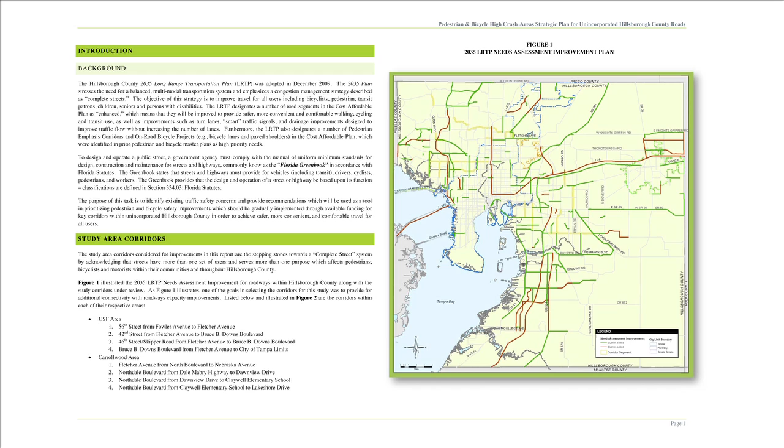The Hillsborough County Traffic Engineering section, under the Miscellaneous Engineering Services General Civil Contract, commissioned a study of these roadways to evaluate pedestrian and bicycle safety recommendations presented in the MPO report titled Pedestrian and Bicycle High Crash Area Strategic Plan for Unincorporated Hillsborough County Roads Report, and to present specific recommendations for implementation of improvements appropriate to these corridors.

The corridors include 56th Street from Fletcher Avenue to Fowler Avenue, 42nd Street from Fletcher Avenue to Bruce B. Downs Boulevard, Bruce B. Downs Boulevard from Fletcher Avenue to Bearss Avenue, Bierce Avenue from North Dale Mabry Highway to 22nd Street, Fletcher Avenue from North Boulevard to Florida Avenue, Hanley Road from Hillsborough Avenue to Waters Avenue, and finally Waters Avenue from Sheldon Road to Florida Avenue.

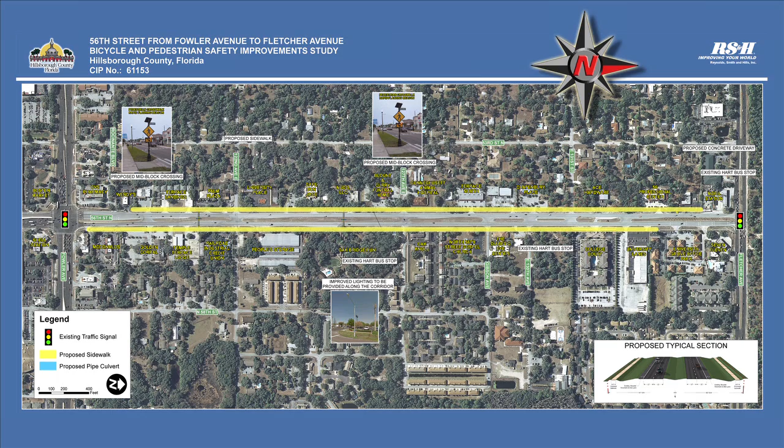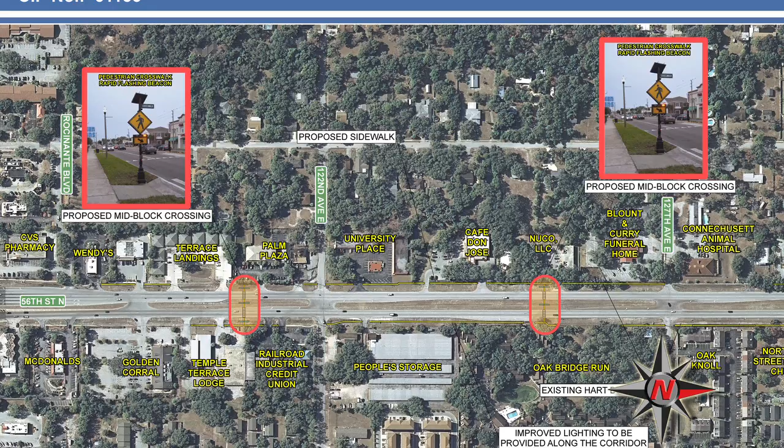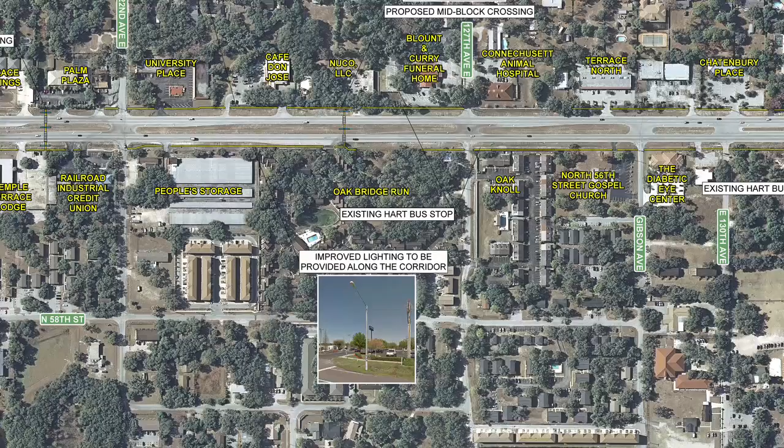For 56th Street from Fletcher Avenue to Fowler Avenue: install approximately 3,200 linear feet of sidewalk along the west side and approximately 2,500 feet along the east side where gaps occur today. Install 2 high-visibility mid-block crosswalks with rapid flashing beacons at 122nd Avenue and 127th Avenue. Existing Hart bus stops will be relocated to the new mid-block crossings. Install street lighting along both sides for the project limits to provide for safer pedestrian and bicycle travel at night.

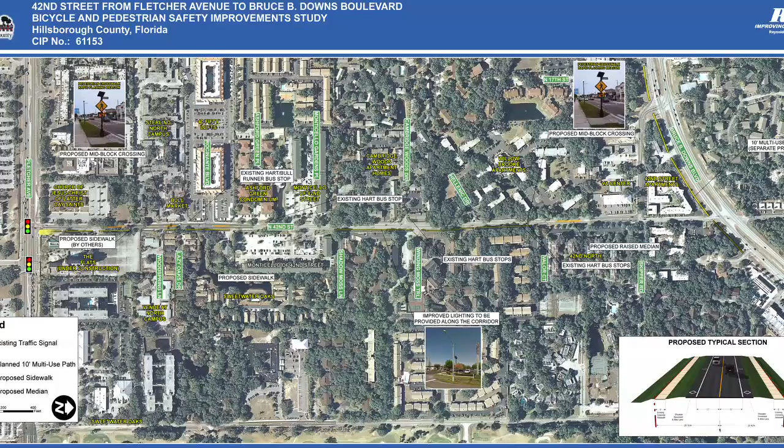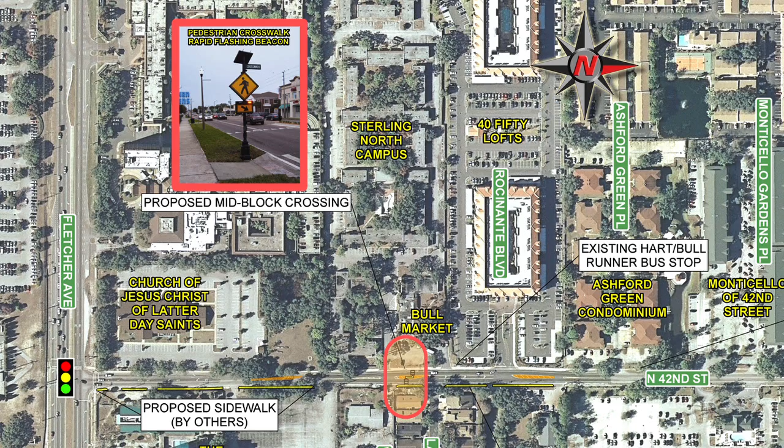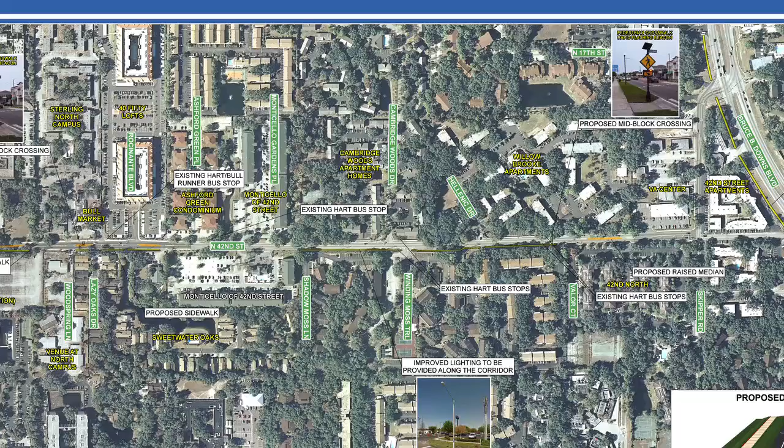For 42nd Street, from Fletcher Avenue to Bruce B. Downs Boulevard: install approximately 1,500 linear feet of sidewalk along the east side where gaps occur today. Install 2 high-visibility mid-block crosswalks with rapid flashing beacons between Woodspring Lane and Lazy Oaks Drive and just south of Valor Court. Hart will relocate existing bus stops to be realigned with each new mid-block crossing. Install street lighting along both sides for the project limits.

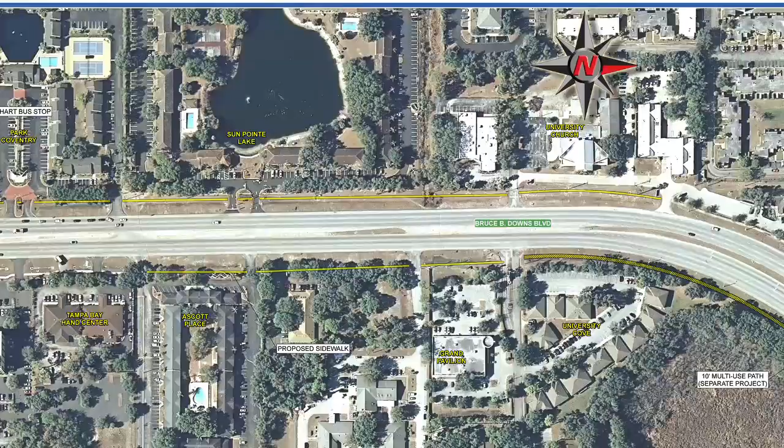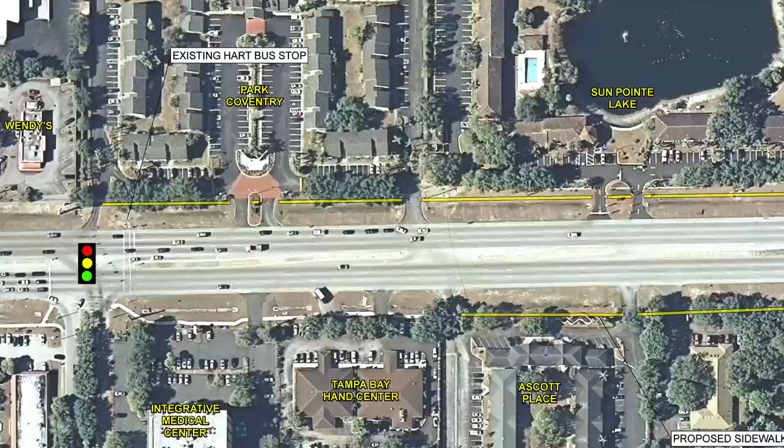For Bruce B. Downs Boulevard from Fletcher Avenue to Bearss Avenue: install sidewalks on the east and west side to fill the existing gaps in this segment of the project. Also proposed are some lighting improvements to provide for safer pedestrian and bicycle travel at night. The lighting upgrades will be done by TECO Energy and are currently under design.

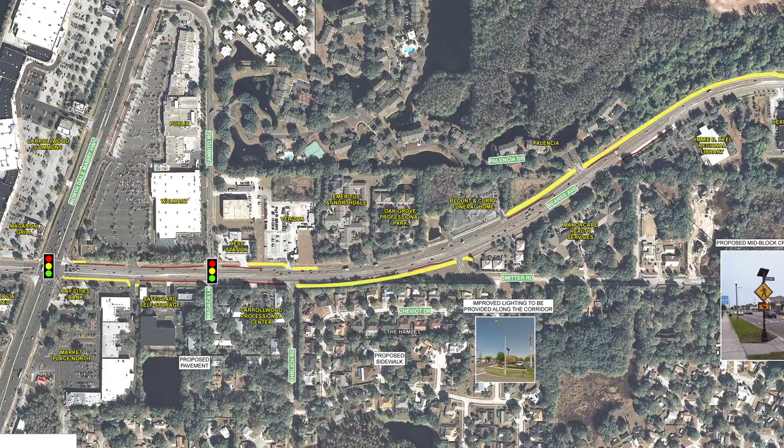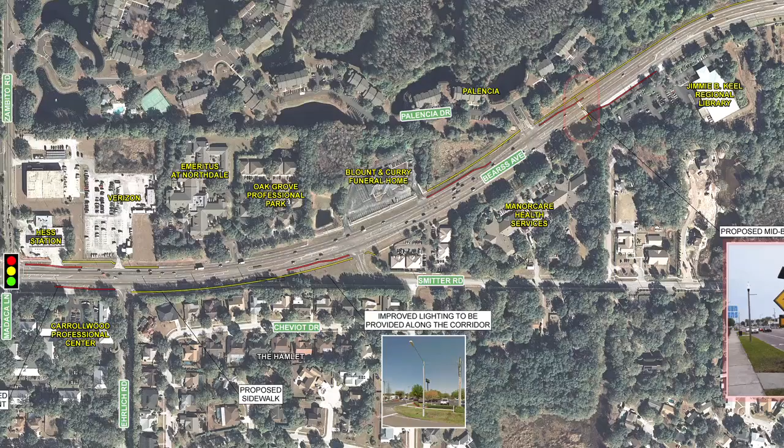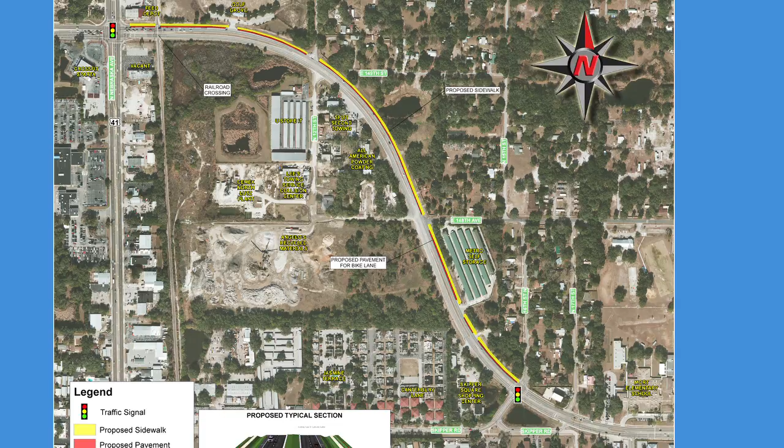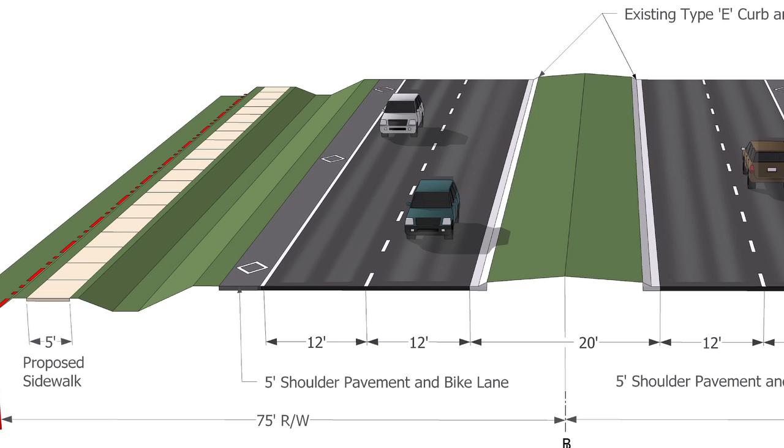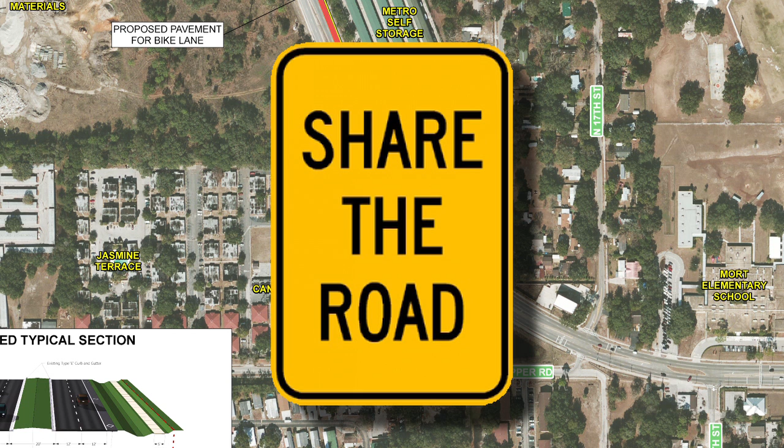For Bearss Avenue from Florida Avenue to 22nd Street: install sidewalks on the north side from Nebraska Avenue to Skipper Road to fill the existing gaps. Widen the existing paved shoulder on the north side between Nebraska Avenue and Skipper Road to provide for a bike lane in the westbound direction. Restripe the existing bike lane pavement markings along Bearss Avenue from Florida Avenue to I-275 and install Share the Road signage between Florida Avenue and 22nd Street. These improvements will improve safety by enhancing driver awareness of bicyclists using the lane.

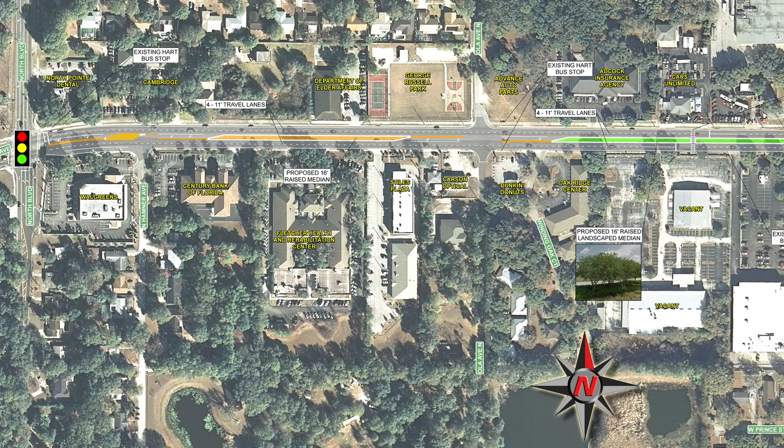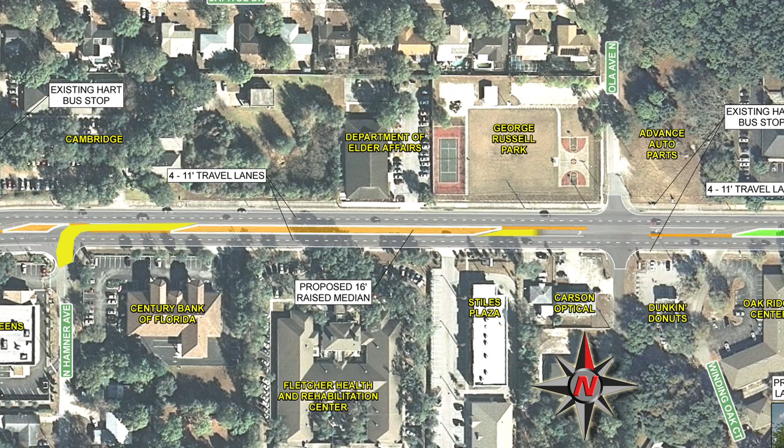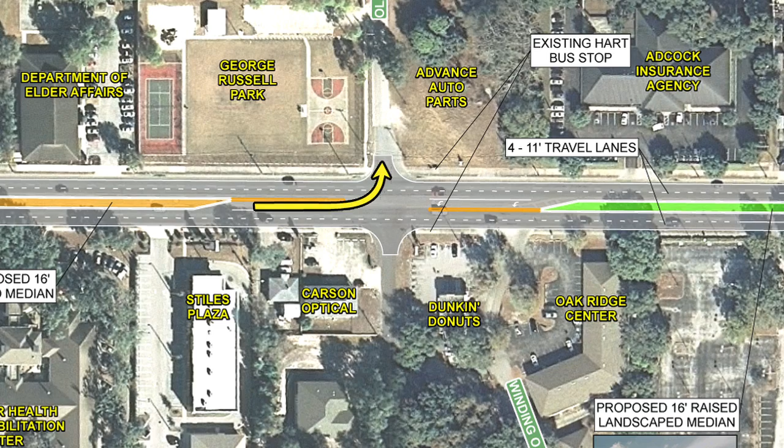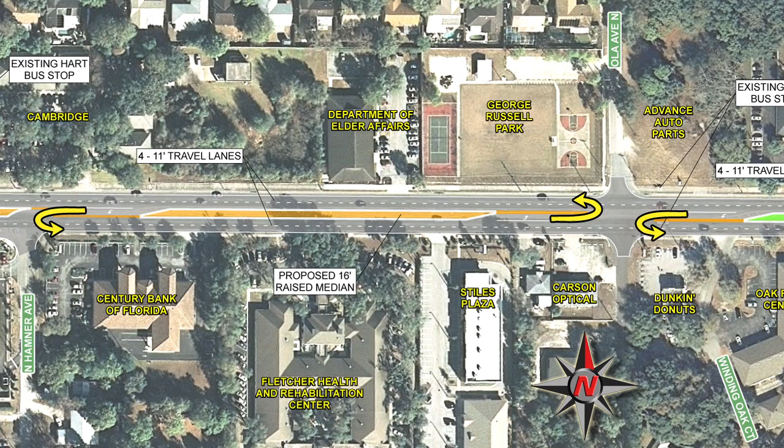For Fletcher Avenue, from North Boulevard to Florida Avenue: construct a raised median to create a safer environment for pedestrians and motorists by providing a refuge for pedestrians, while also reducing the number of lanes a pedestrian must cross at one time. Median openings are proposed at 2 locations: a directional median opening for left turns onto Hamner Avenue and a full median opening at Ola Avenue. Left turn access to properties along Fletcher Avenue affected by the raised medians will be obtainable by making U-turns at any of the proposed median openings. In addition, a mid-block crossing with improved street lighting is proposed approximately 600 feet west of the Florida Avenue intersection.

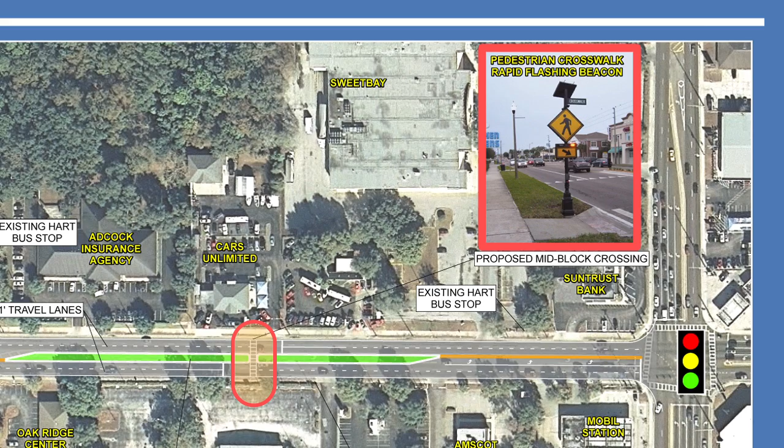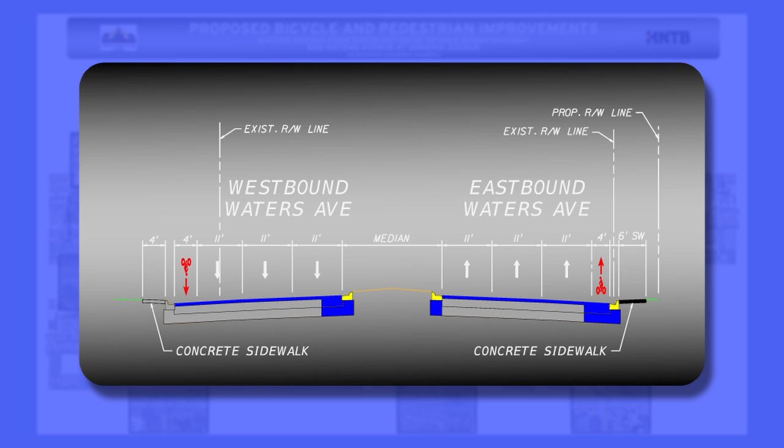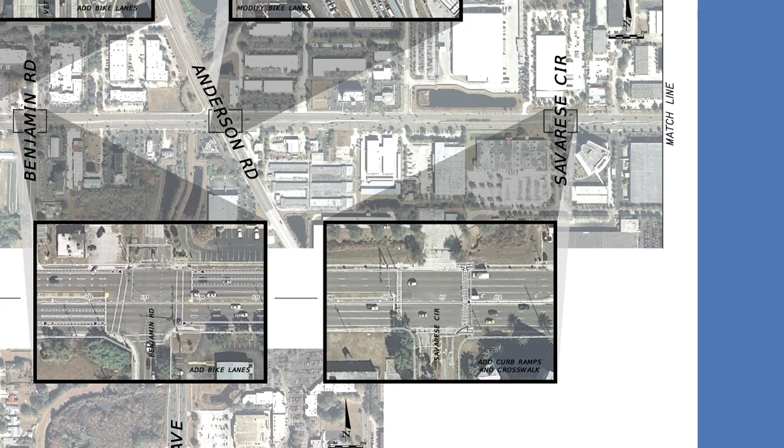For Waters Avenue from Sheldon to Dale Mabry Highway: restripe Waters Avenue from Pinehurst Road to Anderson Road to accommodate the addition of a 4-foot bicycle lane. This will reduce the existing lanes to 11 feet, 10 feet minimum, to achieve the bicycle lane, and adding keyhole lanes for bicyclists at the existing right turn lanes. In addition to the restriping, curb ramps will be constructed on the east leg of the intersection at Savarese Circle. Install new street lighting from Sheldon Road to Anderson Road.

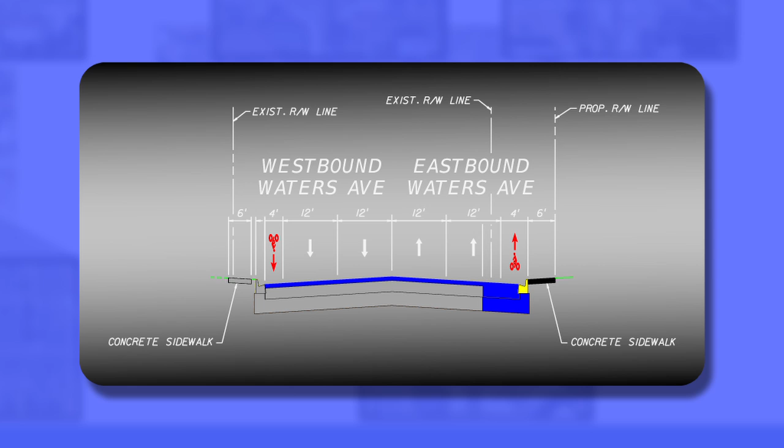For Waters Avenue from Dale Mabry to Florida Avenue: reconstruct the existing curb ramps and add curb and gutter in locations around the curb returns at the intersection of Armenia Avenue, restriping and modifying the pedestrian features at the intersection.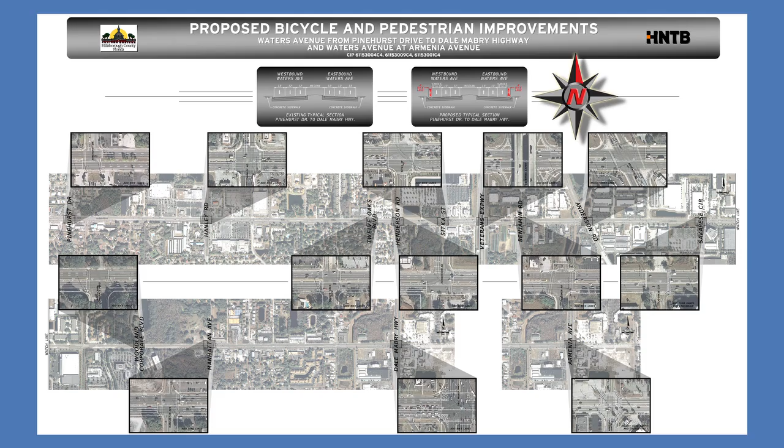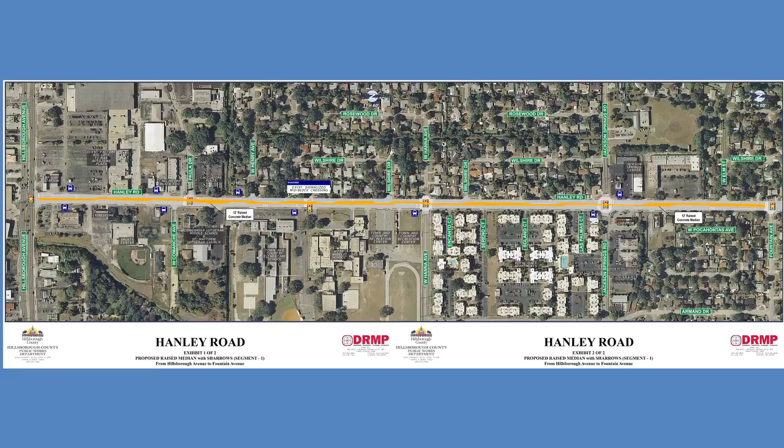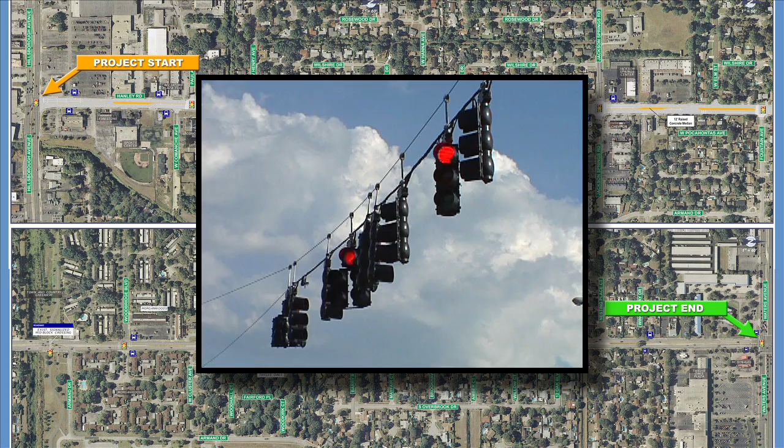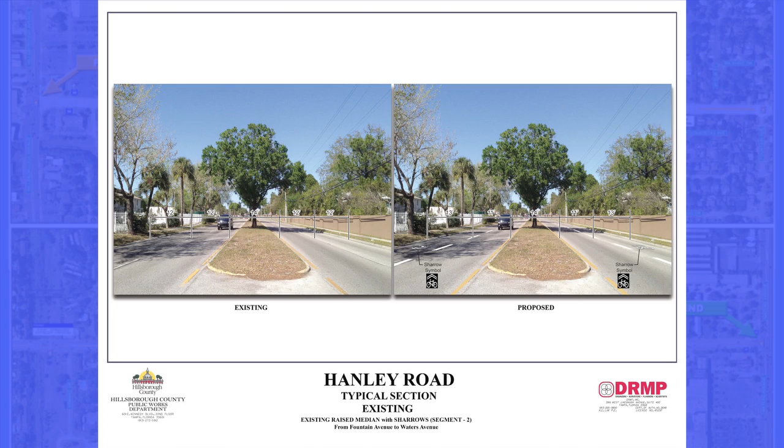For Hanley Road from Hillsborough Avenue to Waters Avenue: construct a raised median from Hillsborough Avenue to Fountain Avenue to assist in traffic control and provide a pedestrian refuge for citizens crossing Hanley Road. This will change access north and southbound, and left turn lanes will be provided periodically throughout this portion of the corridor to maintain traffic flows. Install new street lighting along both sides of the project limits. Minor intersection safety and ADA upgrades, such as crosswalk realignment, are also under design, and signal timings will be reviewed to ensure adequate time for safe intersection traverse. Restripe the project corridor for an extra-wide outside lane retrofitted with bicycle pavement markings.

Based upon your input tonight, we will finalize the design. Once the design is complete, we will proceed to construction. It is anticipated that all the improvements can be constructed within the county's right-of-way. Construction is estimated to start in mid-2013 and should be completed by late 2013. The total cost of the project is approximately $8.5 million.